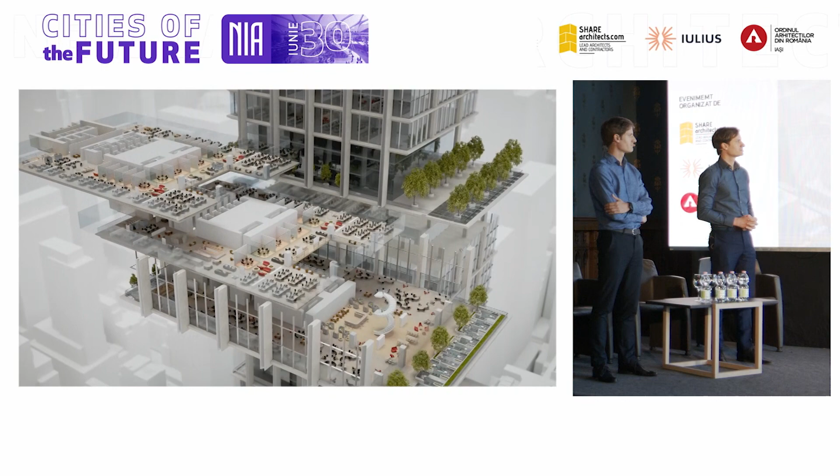Diversity leads to richness, inclusivity, strength, collaboration. Our future leaders stand among us today, those who dare to dream, those with ideas that reach far into the global community. They will carry this responsibility into a future yet unknown, redefining travel, mobility, the way that we work, the energy that we harness, the medicine we develop, the cities that we build, the planets we will inhabit.

Creating a balanced world of nature and humanity, where creativity, connectivity, and sustainability drive our society, working alongside the catalysts of change, the thought leaders, the vision makers, the game changers. We endeavour to improve ourselves, to nurture a workplace you can be proud of, to acknowledge and meet the challenges of an ever-changing world. We are the designers, the innovators, the problem solvers, the drivers of what we will become. In your hands, the power to make a difference. We can be at the heart of helping to design a better future. We have come a long way, but the journey has just begun.

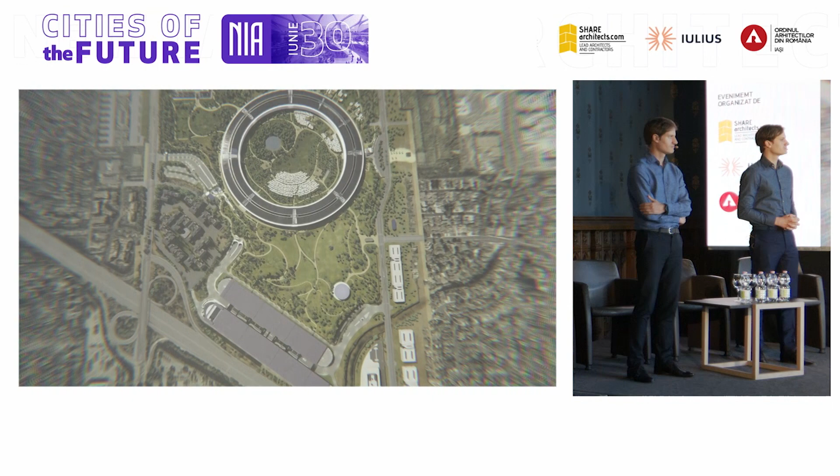I think it's a good ending because it is one of our dear projects, the Apple Park. I think probably some of you know we worked for 7 or 8 years on that project. But of course, we're here to talk about Iași, which has been an amazing journey for us — actually, at the opposite pole in terms of how respectful and how careful we've looked at it.

So the few topics we'd like to take you through today about the project, about Iași, is why we love Iași, the context integration, the public realm, a bit about the development, the residences, and sustainability.

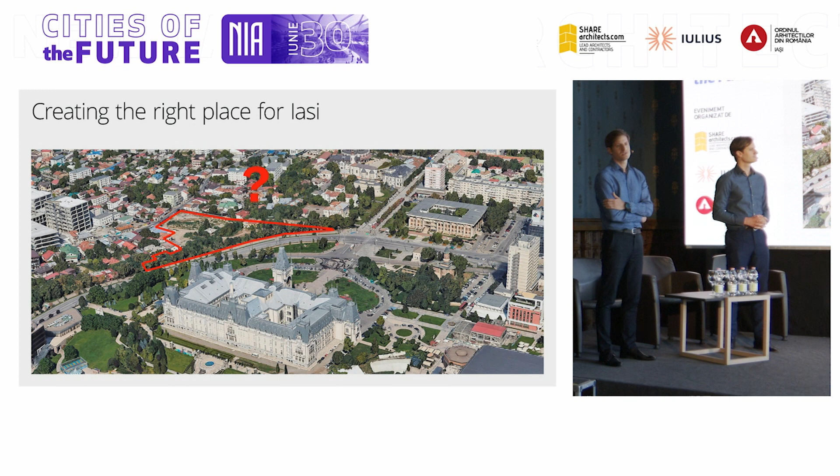We sketched the environment to get a sense for the scale, for the intricacy of details, and how people actually perceive the space. So the main question is, what do we want to achieve here in Iași, and what do you require? And we mentioned this, it's a balancing act for us. It has to be respectful of its history, but also futuristic. It has to be respectful of the heritage, but visionary, and so on.

All these different components, and we have to find the right answer for Iași. It's not an easy answer. But we had some help. The Iulius group, of course, organized all this. Without them, nothing would have happened. But the people of Iași gave their opinions, and we took that into consideration.

It has to be a place for the people, a sustainable city, a green city, a university center, and so on, but also in the corner, small, an architectural icon. So we've tried to balance all that as well.

The experts, the jury, we had a tremendous brief that helped us all develop the project. So all these came to mind, what the project should be: sustainable, friendly, nature, complex, historic, innovative, a catalyst, all of these. So for us, the vision for the project, for Iași, is to be sustainable, friendly, residential, the public realm, a historic heritage, and a destination for the entire city.

So we went back to our London office with a lot of energy. This is our team. We built models, we sketched. This is our professor from Stuttgart sketching on the master plan. Nick Haddock, our head of landscape design, found out he's got relatives in Iași, so imagine he was super excited to do the landscape design, and so on, sustainability team. And we also review it very often with our most experienced people, our most senior people.

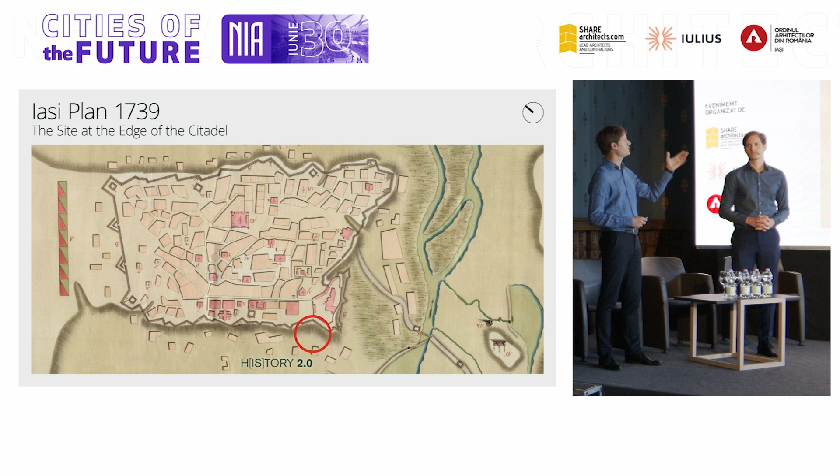So we did an extreme analysis going into depth of what Iași is, and one of the key factors for us was that the site was always at the edge of the citadel, just outside the citadel's boundary. But it was also built, which is interesting, and the front was much closer if you look outside where the current build is. It created a plaza. And everything beyond that was floodable, and actually almost a slum for many centuries.

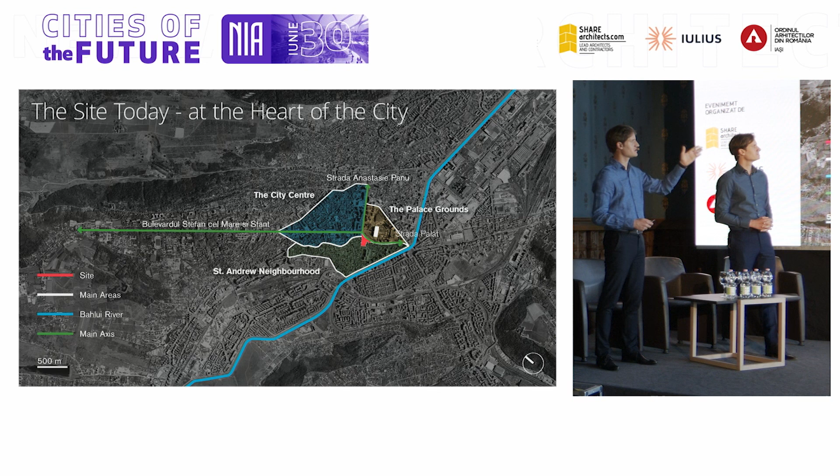When the river got channeled and contained, St. Andrew managed to grow and develop, and that was the opportunity. So now the site, because of that, is at the center of all these major axes and at the center of the city, and has amazing potential. For us, the main one is to bring life from the Palace Park all the way down through the heart of St. Andrew, down to the river park, and make that also a feature in the future.

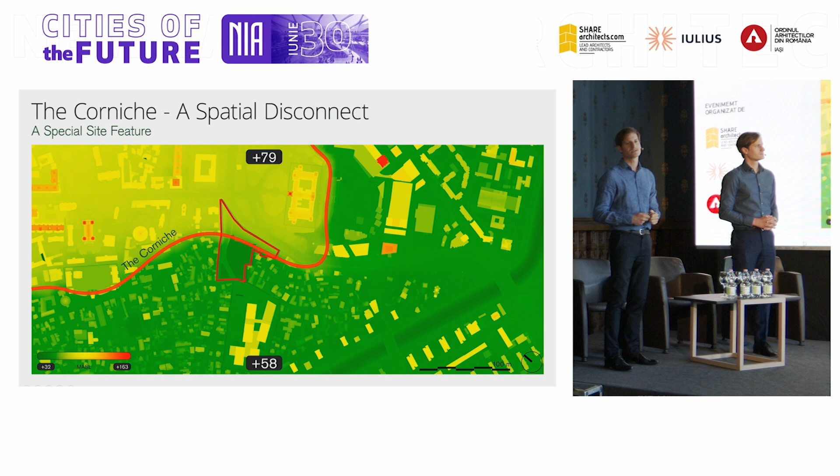We looked at the topography, and here we found this: you have a large level difference which goes all around. I don't think I have a pointer. And you've seen how successful the slope is at the Iulius Mall. We have a similar opportunity here to create a southern and southwestern facing area for the people to enjoy.

And we looked at the streetscape and saw that there's not much connectivity linking down towards the river. So the opportunity, of course, and I think many did this, is to connect through with pedestrian links, but also with vehicular links, almost like stitching the city together.

Enhancing the public realm, lighting and orientation, the outward views for the apartments to ensure best quality for the inhabitants, and stepping the gardens back.

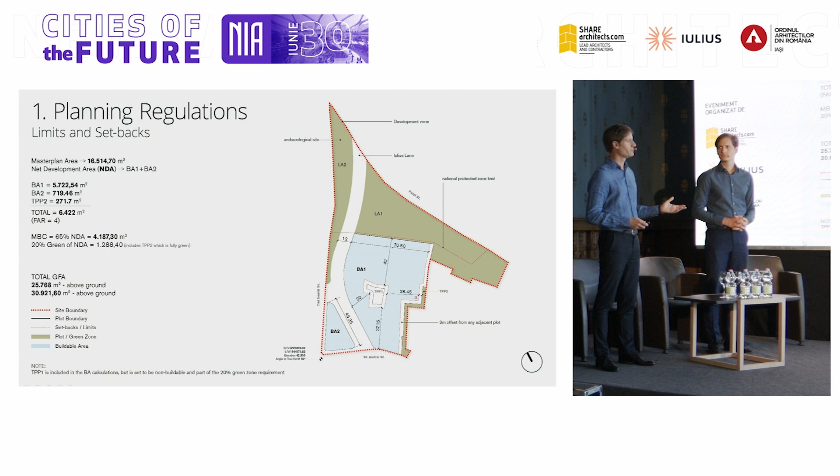So almost like a sculptor, we started shaping the massing. The planning regulations are clear. We personally are very familiar with it, being Romanian, so for us it was quite easy to determine what the setbacks and everything had to be.

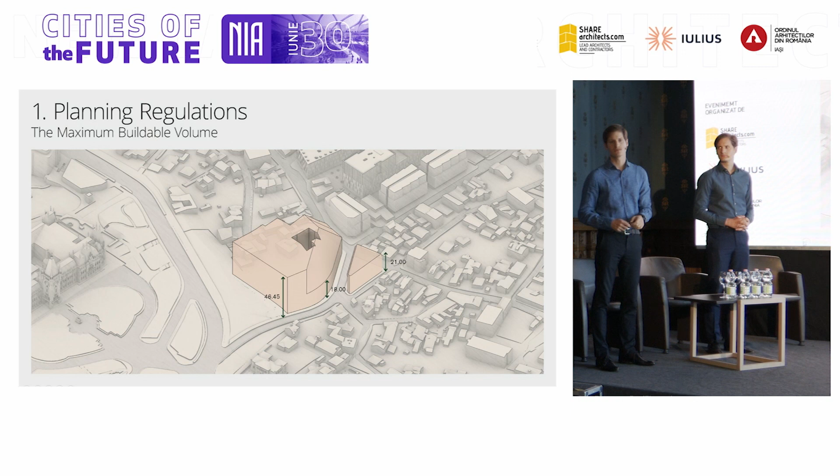This is the maximum volume you would be allowed to build on this site — a bit taller at the palace, gradually going down towards St. Andrew. That was already a clue for us; this is what the city is trying to achieve. So we started this view corridor analysis, and we did it really thoroughly, but we'll come to that.

We've predicted what people flow would do, what the desire lines are, and created connections to link the active zone from the palace place down to the river. And this resulted in further cuts through the massing.

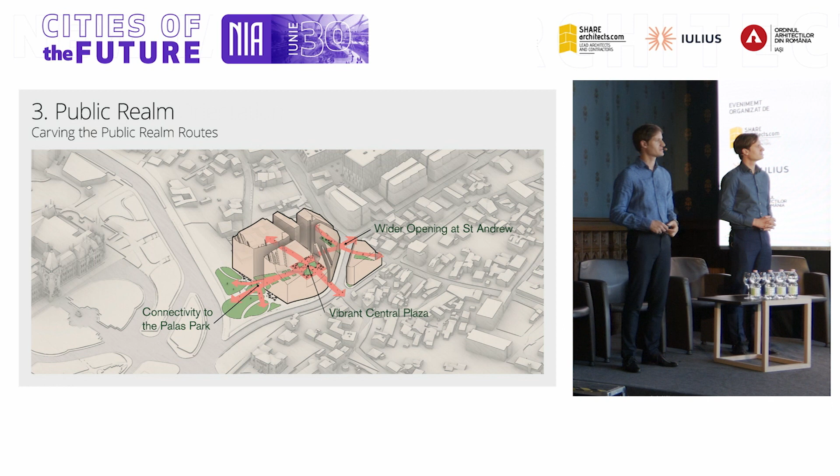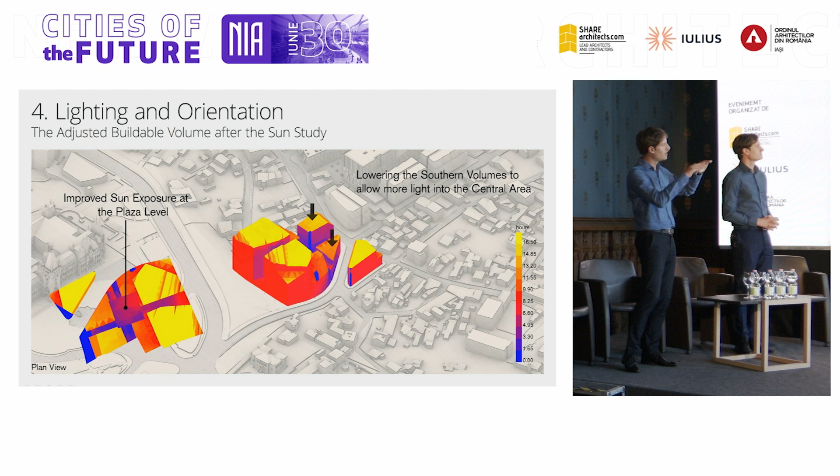Sun and getting light, the right quality for the spaces, but also for the accommodation, for the apartments, is really important. So we mapped the sun on this maximum volume and realized that there wasn't enough light within that central plaza. There's a piece of the land which we're not allowed to build on, it's the regulation. So that for us remained unbuilt, and the result is by lowering those volumes substantially, we managed to get the southern and western sun.

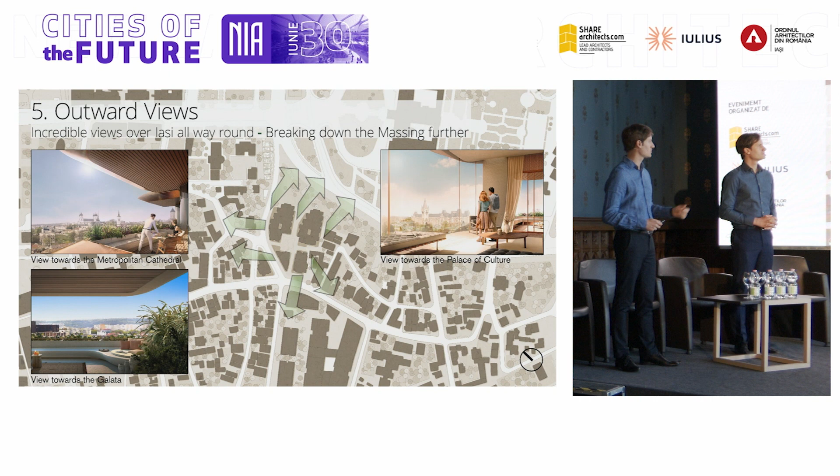This is the volume. And then, of course, for the apartments and the quality of those, the best views, looking at the palace and looking also towards the city and also Galata towards the south. And we've run that parametrically to study and prove that everyone has great views out.

The final step is this stepping terraces towards the St. Andrew Quarter. It's providing this landscaped environment, a garden, quality for the apartments, but also helps us run down towards a different type of grain.

We did loads of studies. We play with models, and we've tested them. And for us, we think there's almost like Cinderella's shoe - the building has to fit within the given parameters, which we've studied. Yeah, and this is another model. That's how we work, it's almost impossible for us to detach. It's the best way to look at it. There's a model downstairs, but we've done it ourselves as well, just to understand it better.

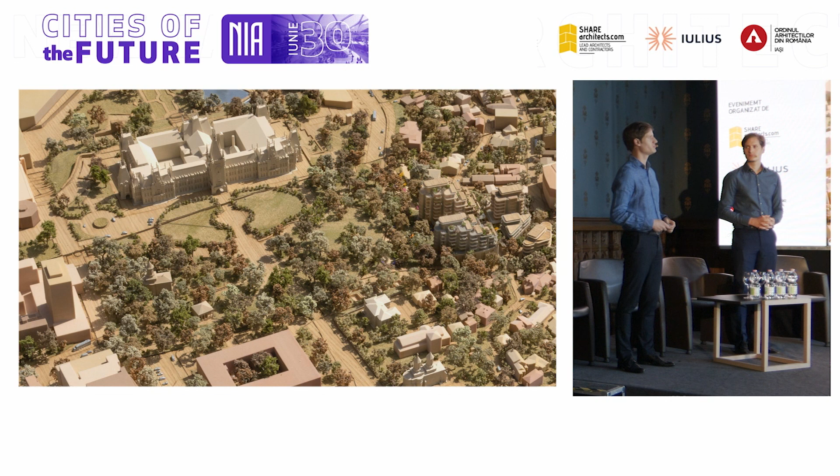And it has more context and more activation. So protecting the views will go quite quickly. Everyone has done it, but we can assure you this has been studied in thorough detail. And there's protected views, sensitive views, and complementing views.

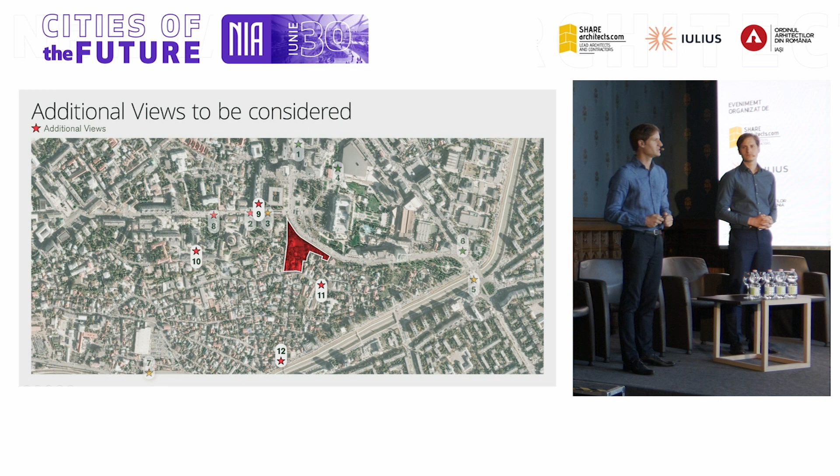All of Ștefan cel Mare, as you walk through it, you should never see the development. It doesn't matter how important it is. It doesn't matter how beautiful it is. You should never see it. Yeah, so the massing in its state is always hidden behind the monuments.

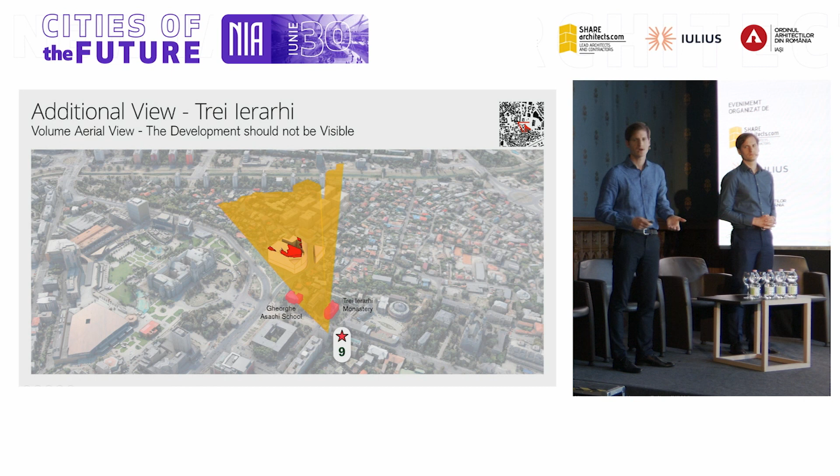There's one particular view, if you go to the other side of this street, where you could see a bit of it. So the immediate step for us was to cut it off. You can't see it, it's conflicting with history.

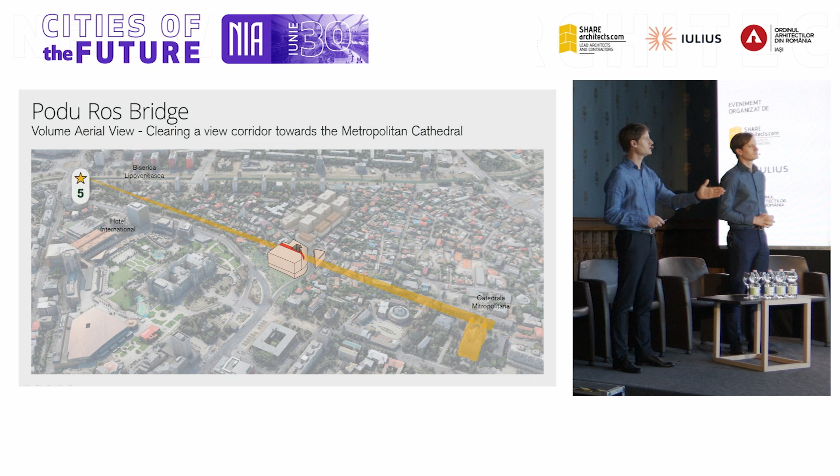If you go to Podu Roș, you can see the Metropolitan Church, Cathedral, and you can see the overlap of the building. Again, immediately, we want to remove that. We want to have this view corridor, to see the cathedral. So the cut goes right through the volume.

You barely see it. But also this opportunity, while you're there and you walk around, to enhance the riverside. So for us, it's looking outwards - it's not looking only at the site. It's looking at the entire city and finding moments.

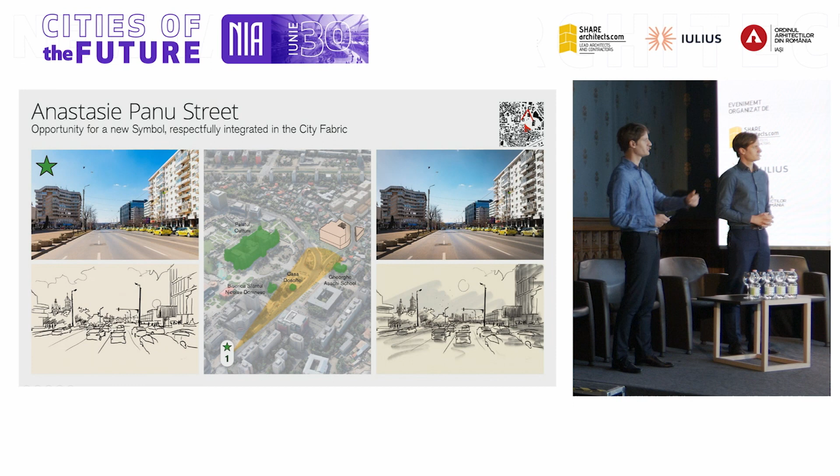And there's some other views, yeah, where you complement - the building becomes part of the composition. It's end of the perspective, in this case, or within the palace place. And we've tried to break down the massing, scale it down to start meeting the height requirements for the old monuments.

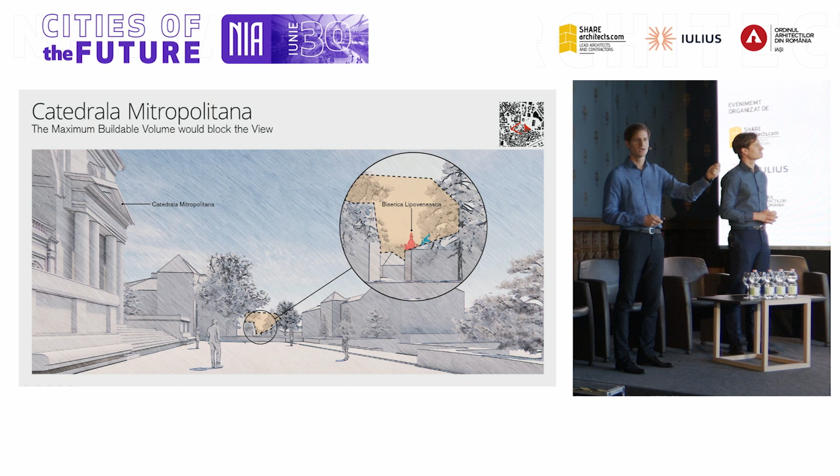We've also done a few additional views because we walked around the streets and found out that there's really important sight lines that should be protected. One of them from the Metropolitan Church, looking to Biserica Lipovenească, and you can see those towers, and they're actually shining in the light. If you see, it's quite a glossy surface, and it's a pity to lose that. So again, we've reacted to that, and you can see it now.

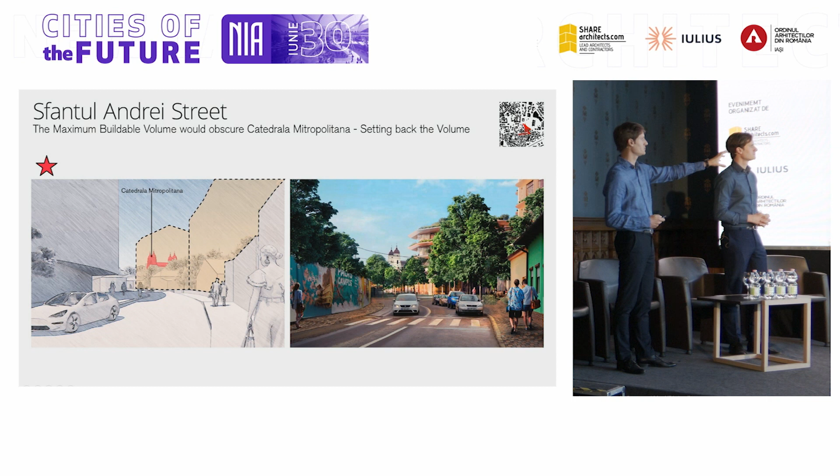Similar from St. Andrew, as you walk to that street, there's a visual connection to the Catedrala Metropolitana, and we can recess the volume or cut it in order to allow for that view to happen.

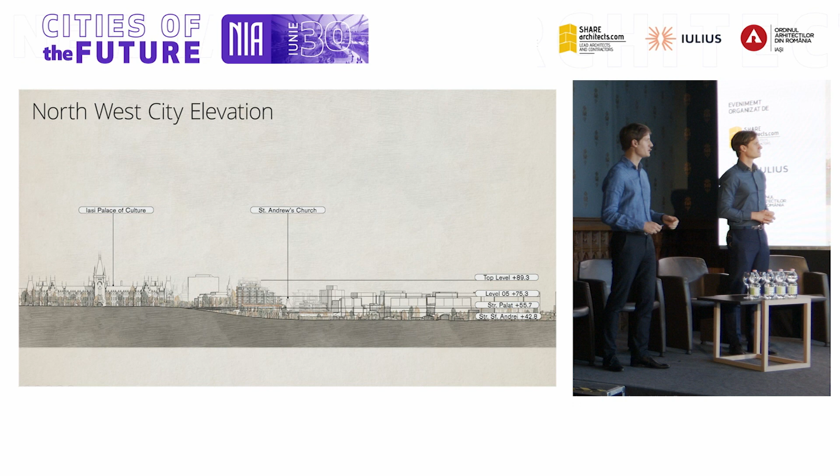So after all these steps, from this maximum volume, which is the regulation - you can build this - we went into shaping it to a grain that we think feels very integrated within the fabric. Larger buildings to the front, the smaller grain towards the St. Andrew quarter. And also in section or elevation, you can see the palace is still always the king of the place, and our building is creating a front and gently stepping down towards St. Andrew, always below the palace.

In terms of the development, the building itself, a few ideas so you understand how it's structured. The public realm is for us the most important thing. It's a high space everyone can go through. It's public. This is a gift for the city from everyone, from the developer, from everyone.

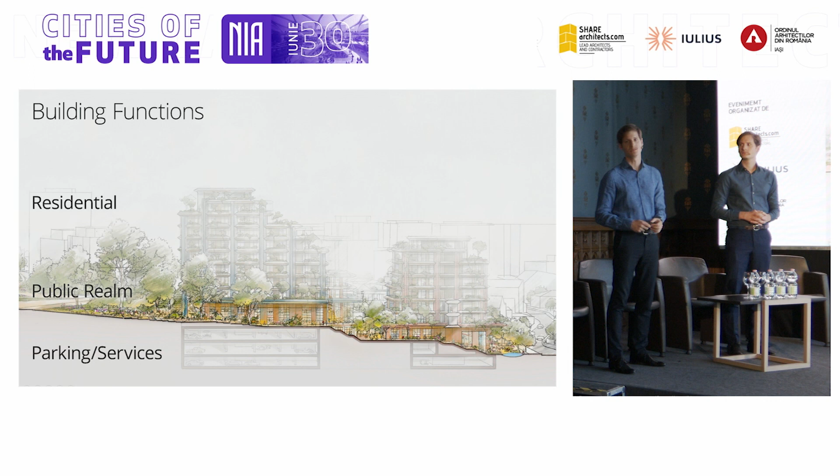The residential is clearly separated. It's a more private program, and we want to keep it separated in terms of function, acoustic, and so on. And below the services, the parking that's required per law, also as efficient as possible, because the more efficient you do that, the more quality you can have at the top.

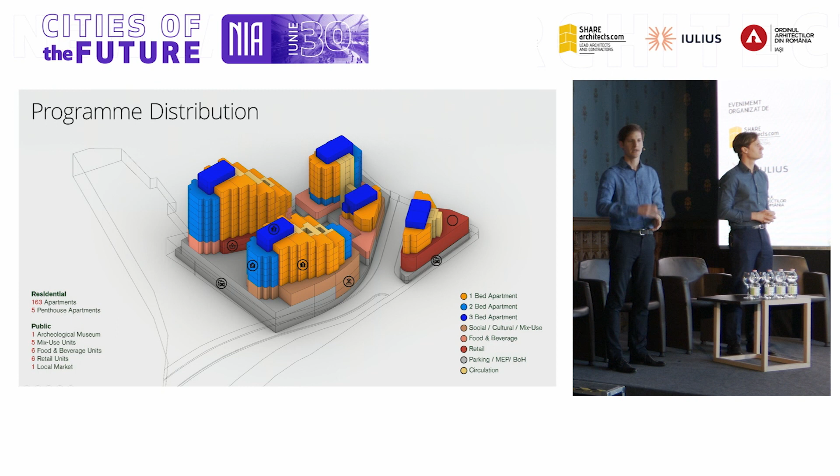In terms of program, residential primarily in St. Andrew—it makes a lot of sense to have some of that on our site as well, and then the activity towards the palace. So that's basically how the massing works for us, very simply. Parking, the whole commercial or public space at the ground plane and first floor, and then everything above is apartment—very well structured.

The public realm is the most important thing of the project, and it's structured around the people of Iași. So we took into account everyone's opinion, and we wanted to create this place really as vibrant as its people, very diverse. We go from the Palace Place, meandering down a landscape path into a contained plaza, which can be the heart of this place, and then further down to St. Andrew, where another little plaza is.

I think the project should be called—just a little annotation—I think 'The Heart of Iași' is probably the title of the entire competition. For us, it's probably 'The Heart of St. Andrew,' that's the title, which is more appropriate probably. The Heart of Iași is obviously this place in front of us, while that can become something that relates to this, but also to the St. Andrew neighborhood, which was always somehow forgotten in history.

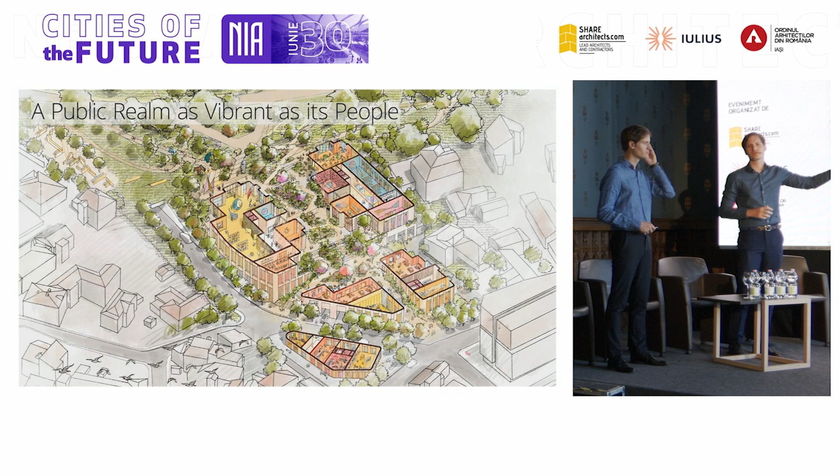So it's a really active place that is programmable all the way throughout the year. You can do events there, and you can have people meeting.

Now, day one is where we see the development today, structured around the plot, and we've designed it in such a way that all the cars actually stay on the outside. You don't bring drop-offs onto the site. We want to enhance the public realm as much as possible. It's all a park. But what we saw as an opportunity is actually the future, where you think...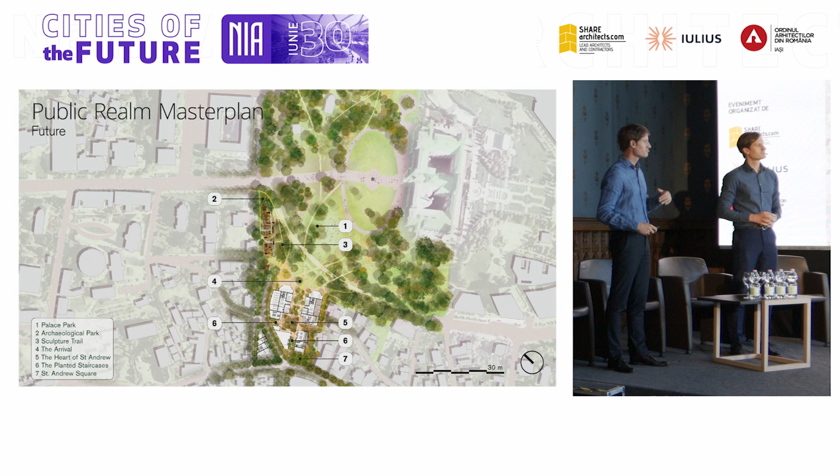Anastasie Panu and Palat Street could be connected through an underground connection, and that could open up this whole thing to the palace. It's pedestrianizing this area and connecting Ștefan cel Mare to the palace entry. I think that's years ahead—we don't know if that's possible, but for us, it became a dream. And we think this could be a real contribution to the city as well.

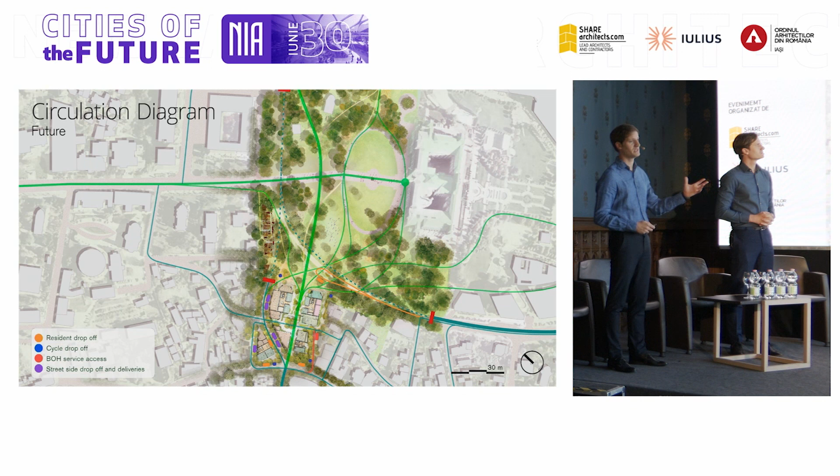So, really a pedestrianized area, a large park. And we said, how can we quantify that? How can we explain it to you? It could create a park that's 11.5 hectares, the same size as Copou Park at the end of this axis. So you have these two poles, two amazing parks within the city.

Some scale comparison—Jardin des Tuileries in Paris, for example, or Green Park in London. It could be absolutely amazing having something like that.

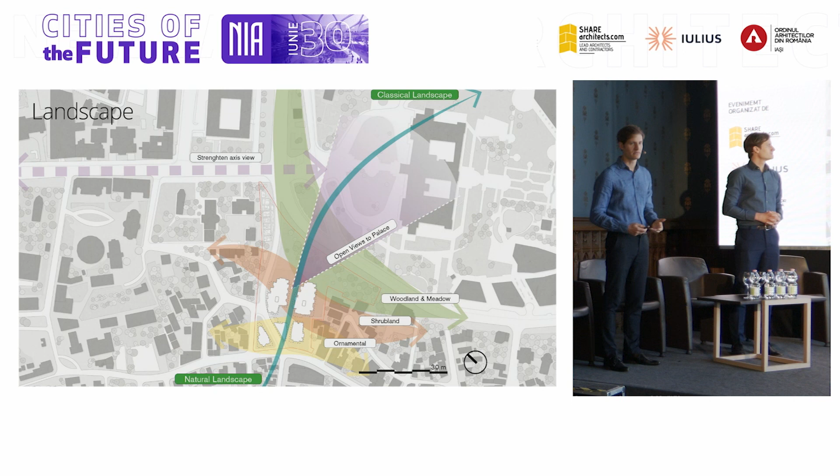Landscape-wise, the concept is to come from a classical landscape towards a more naturalistic one towards the base, towards the river. It's a clear reference to the formal part of the city, the Palace Plaza, and then the more natural riverbanks. We even worked out the palette—I told you about the landscape architect in our team who found family here. He got really excited; we have a native palette here as well.

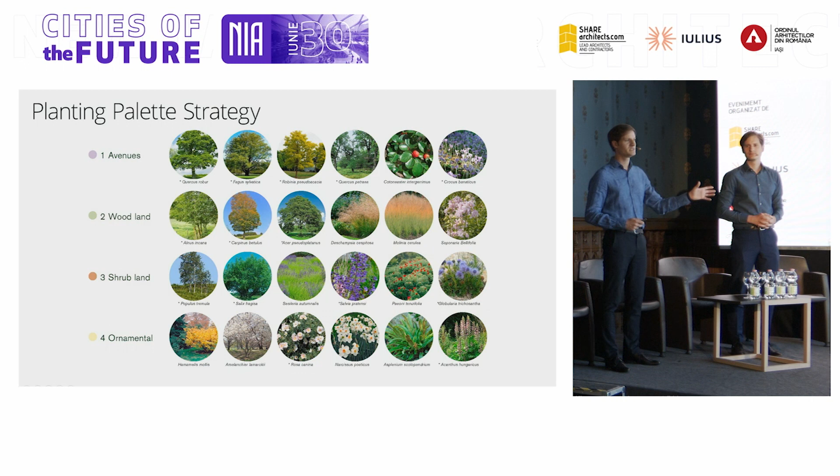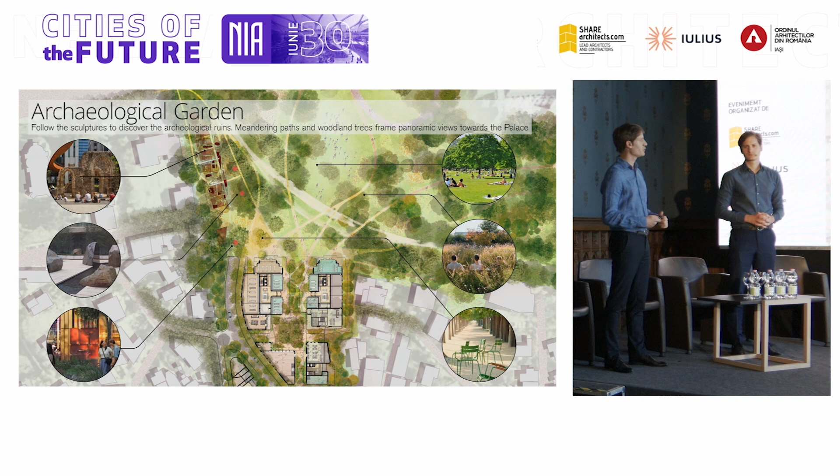Heritage, and how we enhance it. We have an exhibition space and a gallery within the left-hand side building.

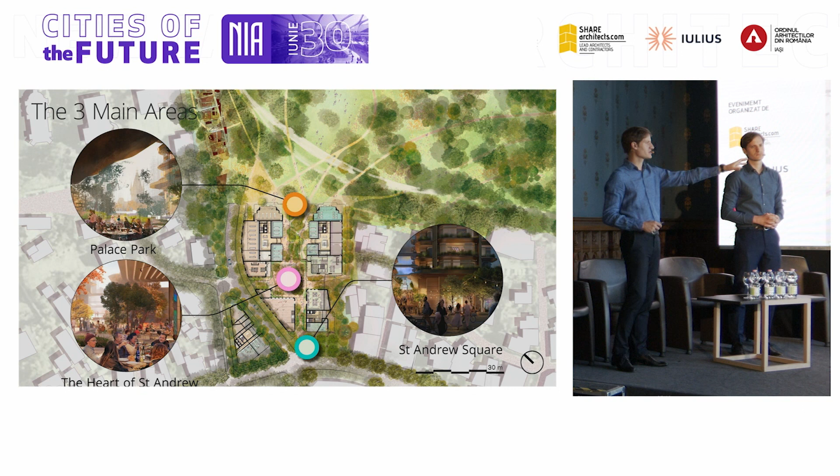There are 3 moments within this project: there's the park at the top, there's the heart of St. Andrew—the central plaza—and the St. Andrew Square at the base. And this is how they relate to the topography. Topography gives us a chance to create different moments, different quality of spaces, and it should be super vibrant and varied.

The St. Andrew Square is dedicated to the neighborhood—it's supposed to have little shops, flower shops, the butcher, all the amenities the city would need. The heart of St. Andrew is something more vibrant—it's restaurants, it's evening, it's sunset, it's all of that. And the park, the Palace Park, is a bit more formal—it's what we see here, enhanced.

It's the layout. We have the 2 major buildings towards the palace, which is a bit more formal, so we have larger mass here. And then as you go down, you have the 3 smaller elements facing the St. Andrew neighborhood.

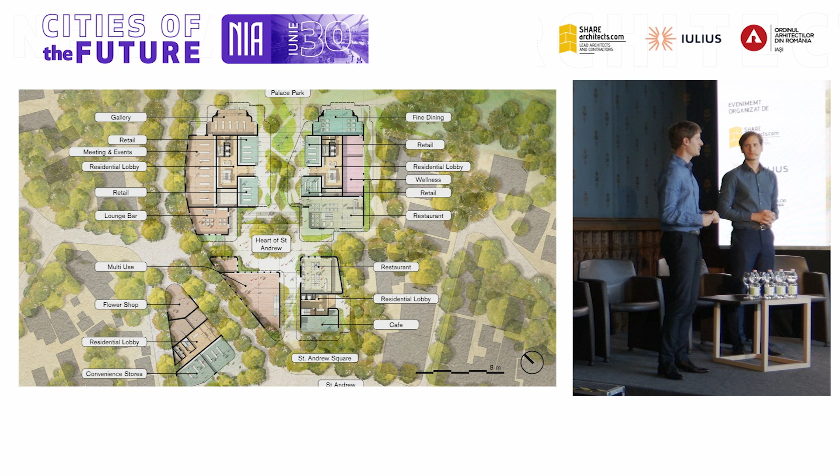Really important for us was to activate the streetscape as well. The opposite side might get improved, and we think this should be a pleasant walk down the street towards the river. It's not only about the internal circulation.

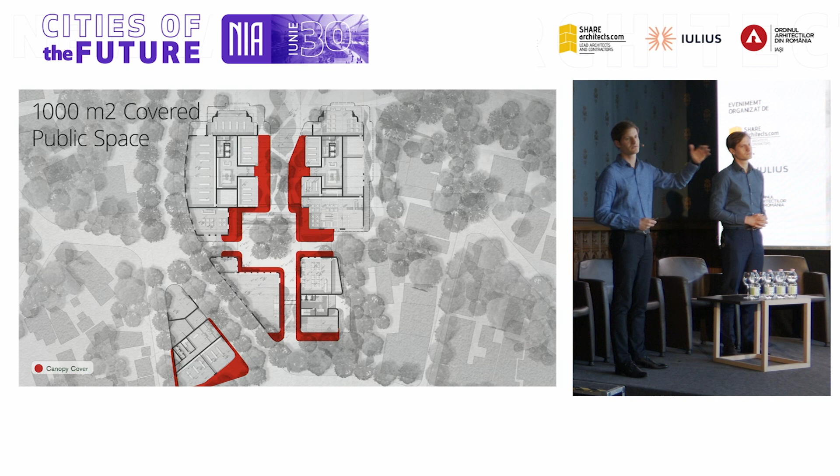The heart of St. Andrew is clearly defined as public space. A really interesting thing we wanted to bring here is the quality of the outdoor space, so we're giving 1,000 square meters of covered outdoor space.

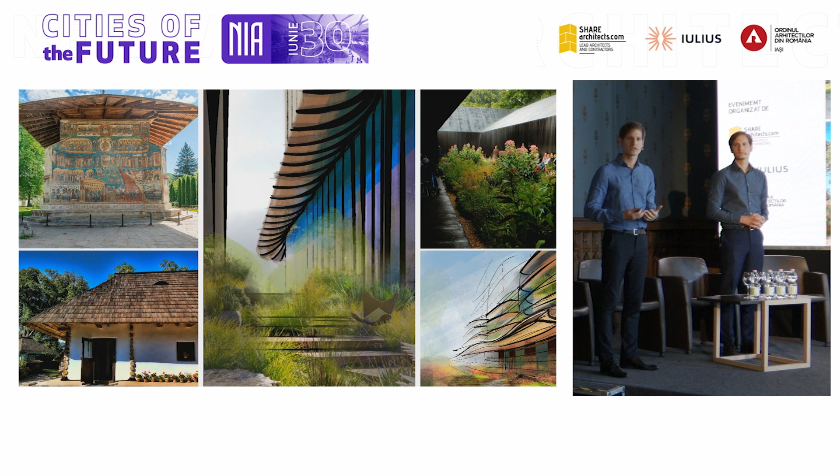This idea is really embedded within the Romanian, Moldavian way of thinking. It's a very sensible approach to how to be outdoors when it's raining, when you have too much sun, how to protect the building. And we took that a step further, because we know the climate actually wants this.

There's great quality from March to November. You can stay outdoors and enjoy the weather, but it's also quite rainy, almost as rainy as London, so you want some protection.

This is an image coming through that pathway towards the river, and you can see people enjoying the weather, enjoying the outside. It can be autumn, and you're still outside, protected.

This canopy also provides privacy from the apartments above and creates a clear separation, which we think is required. People want their privacy. The warm materiality—we think the future is happy, warm timber, maybe stone. It should be something pleasant.

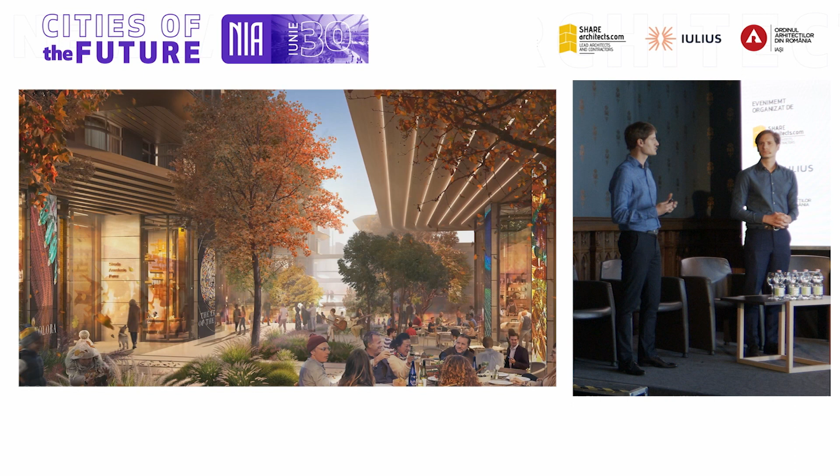It's a place for the city. As you move down to the heart of St. Andrew, you get a larger height, people enjoying the outdoors. It can be almost like a Rockefeller moment, people come there to enjoy all seasons.

And of course the view corridors—you can see all these different historic elements and the connection to the monuments.

Coming down to St. Andrew, this is a much smaller scale dedicated to the neighborhood, with a reference to the river, a little water fountain. People can stay and enjoy the evening sun.

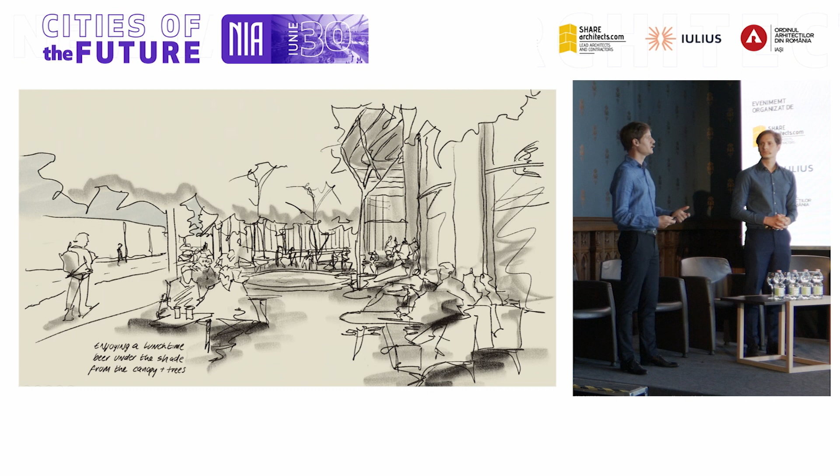This is orientated towards west and towards south, so you can imagine in the afternoon enjoying a coffee or a beer with the sun—it could be the best moment of the project.

This is the view in the evening for the neighborhood. It's a smaller scale, people come in from these little streets and find this oasis. And still you see this connection to the old city—Trei Ierarhi, Sfântul Nicolae Domnesc, and the palace.

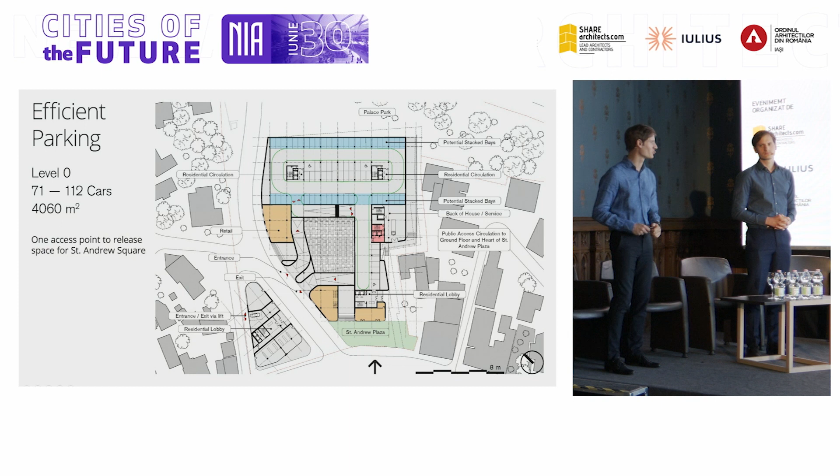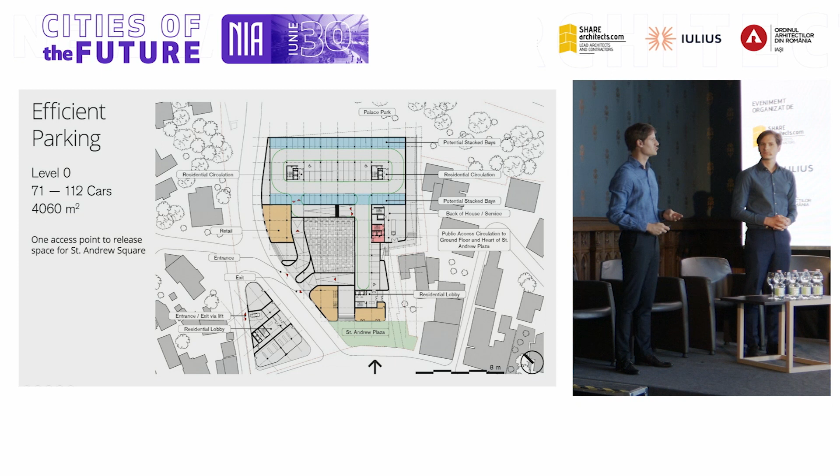In terms of parking and the building, for the architects and those more interested, the few points we took from this was to try and keep it as efficient as possible. We've created a large block at the end containing most of the parking, managed over 3 levels, which allows us to future-proof the building.

In the future, maybe there's not so much parking required because of self-driving cars or closer proximity, so you can transform the conventional section, either putting in more car parks or transforming it into offices or retail or anything you want.

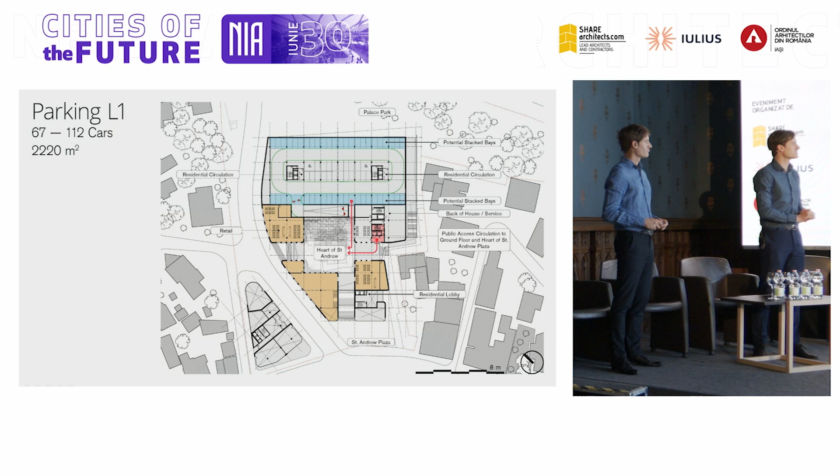So the ground floor and first floor can be transformed in the future. As you can see in this plan, it's parking now, but in future you could have offices or further commercial opportunities—shops, kitchens, restaurants, whatever it is. That's a big future-proofing component.

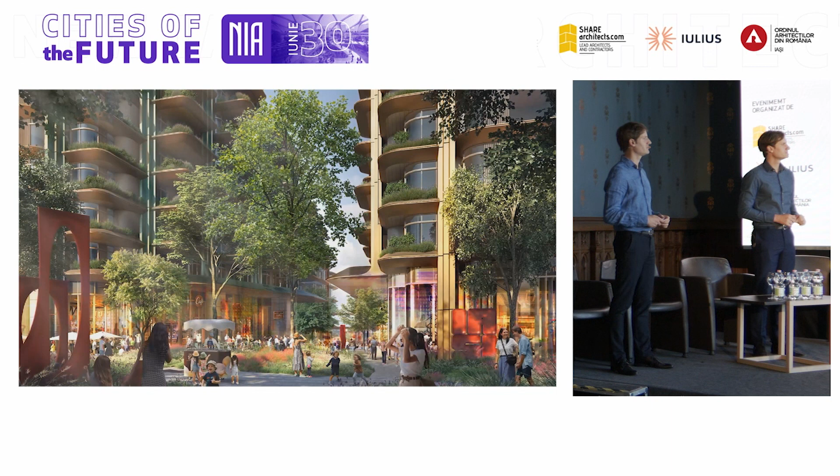Coming to the residences, this should be a proper address for its inhabitants. It has to be successful also for the client, for everyone—it has to be a viable project. So we've tailored it into these 5 buildings, all of them slightly individual.

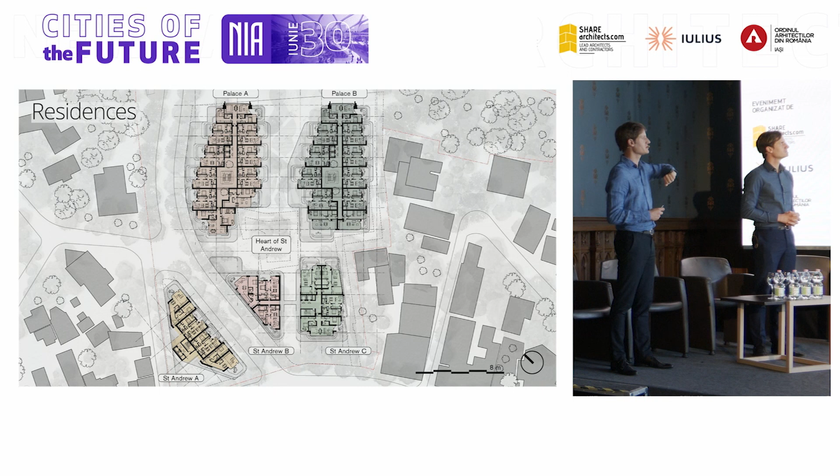The ones at the Palace we call Palace residences, and the St. Andrew residences have quite discreet entrances. You come in gently, but then the space opens—there are large residential lobbies, and we wanted to emphasize this verticality. The atriums are open, so you can see over multiple floors, giving a grand sense of entry to your building.

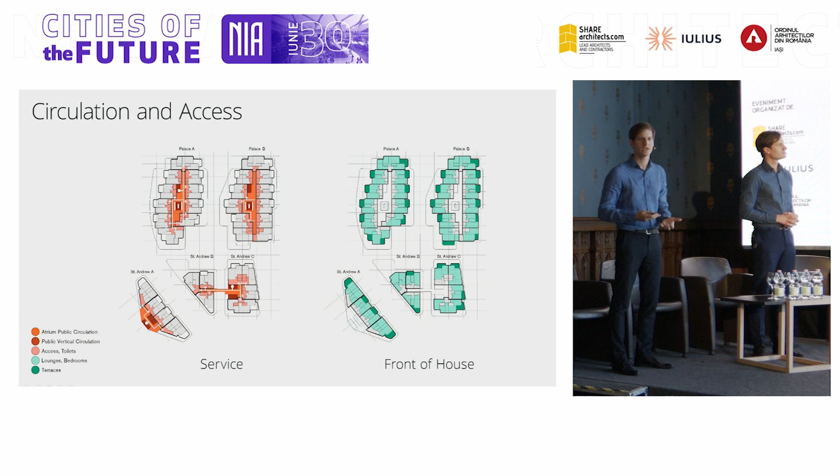Simple layouts, with everything arranged around the central atriums and cores in terms of functions, and then all the front-of-house spaces—living room, terraces, bedrooms—all facing out toward the views.

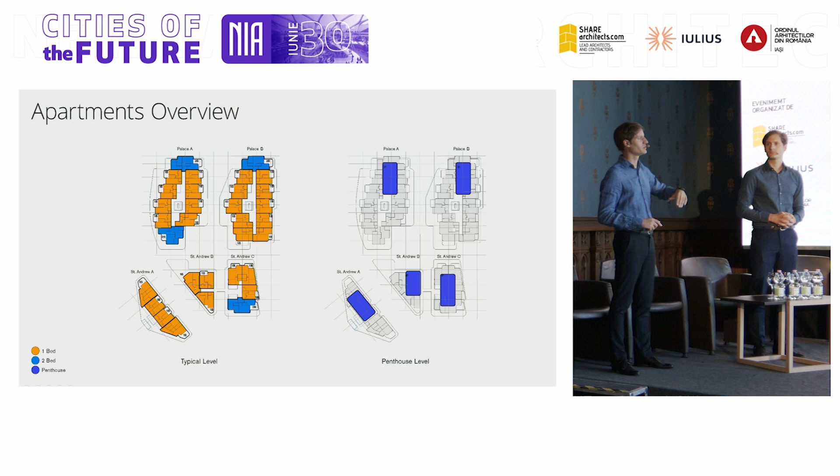Everything has great quality. The 1-bedroom apartments, the 2-bedroom apartments facing the most incredible views, and each building has a penthouse at the top, a 3-bedroom apartment. Just as an example, this was the brief.

Very small 1-bedroom apartments, but for us, for every single one, we want to ensure quality. So you come in, you've got the living and kitchen. Kitchen can be closed. A large terrace, very important, because people start enjoying their homes more and more now and got used to spending more time there. And an ensuite bedroom. And this, I think, has quite a quality. The planting acts as a filter, etc.

I think also worth saying is every apartment type has this corner condition, so you get diagonal views throughout from each and every condition.

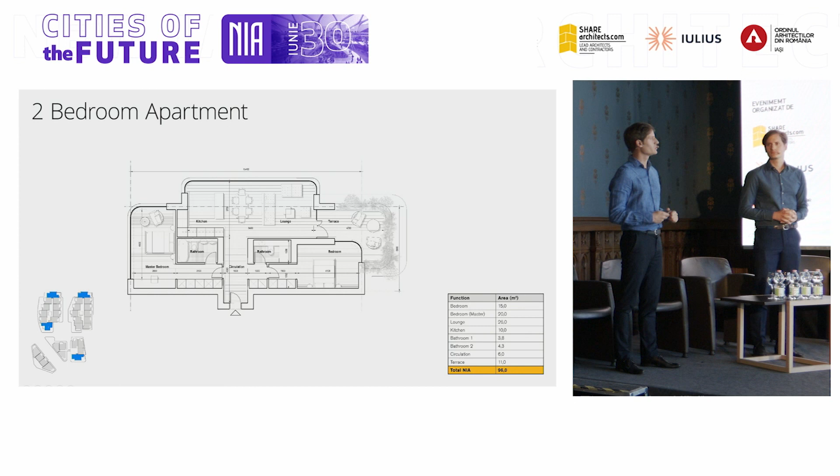The 2-bedrooms, these ones are facing this place, the Palace. You're coming in centrally, you've got this longitudinal living room with a terrace, and just quicker, this is the view you would get.

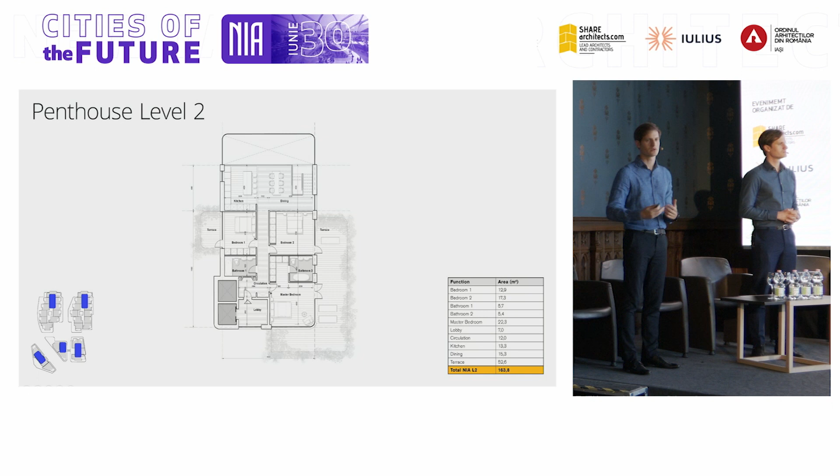I think it's really incredible for whoever moves in here. And then the penthouse, these are 2 stories, large double-height living room, terrace all the way around. And you can also access the upper floor through a service route from the 2nd floor.

You want to talk through the vision? Okay, in terms of the vision, I think for us there are a few components. It's the verticality, what we recognized. Every building in this city, or the majority of the important ones, the Palace, all the churches, the Cathedral Metropolitana, they all have a common theme. It's verticality, and we tried with our concept to express that.

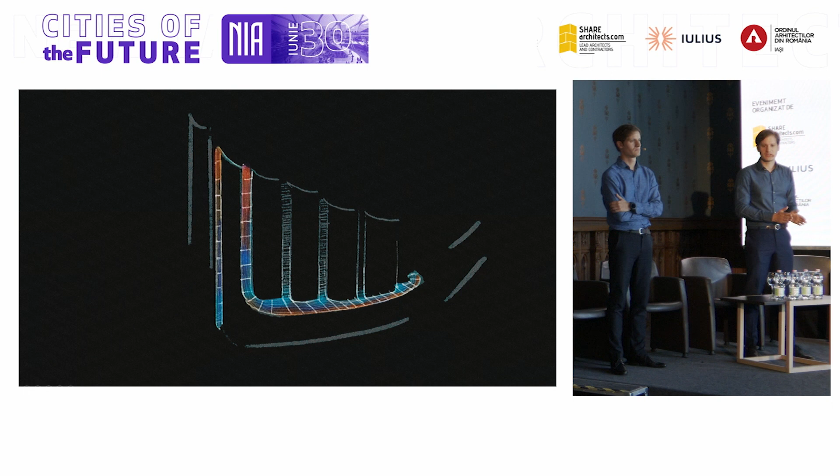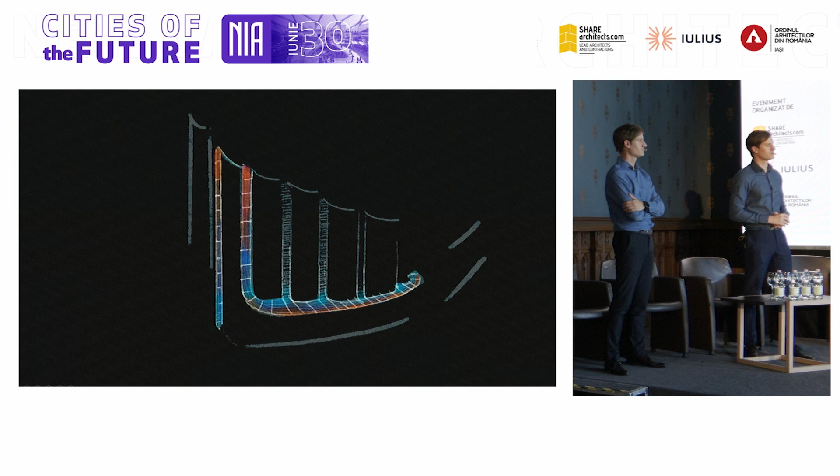The other one was the horizontality of the canopy and this overhang, which creates this intimate feeling of being under the canopy, in this warm and friendly environment. So taking all those on board, we developed this with a strong presence at the Palace, the enhanced verticality, which also creates this slender, minimal appearance, imagining it outside, and then translating it into the horizontal plane. This can create quite an iconic and striking appearance, which would work very well in relation with the Palace and the existing fabric.

You can imagine it in a few years with the park in front and the whole landscape coming to life. I think this is what we're looking to achieve, this openness of the space, the building leading you through to the next piece of development in the city, the river probably, and creating this permeability through the site. I think materiality was also one of our topics we thought about in depth, and we wanted to make it of the place.

We found inspiration in all sorts of materials and buildings, and something that drew our attention is the terracotta or tiles. There's a lot of craftsmanship in it, in local history, but we of course want to give it the innovation and the twist, it has to be very performing. It can be large formats of super bioactive ceramics which can do self-cleaning, and they can even do air cleaning potentially. So quite innovative in that sense.

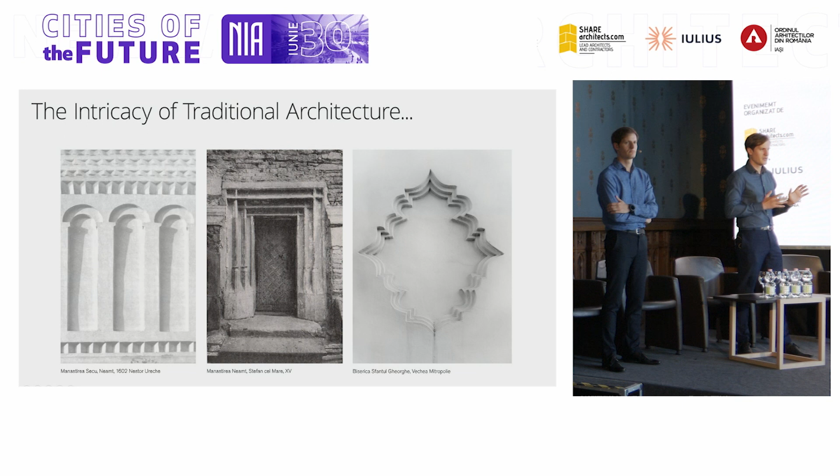It gives us also the opportunity to separate and differentiate between the 5 buildings, to give them their own identity, because we're building a part of the city, a small neighborhood with these buildings. And then we found the intricacy of the details as well, which highlights in a way the verticality, but also refinement in the project.

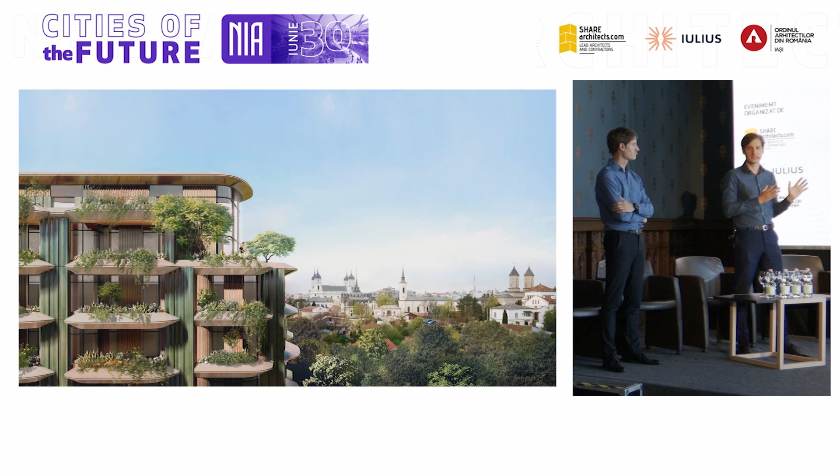I think this helped us define and create an architecture that is timeless, that would stay and withstand the passing of time. Sustainability, really, really important for us. We left it for last, but just to make a point: everything you saw is building the layers of sustainability from bottom up, with a park, with a wellness component. Our office has been doing sustainability, as you mentioned, since the 70s, since it was founded, and throughout every project there was innovation in that respect.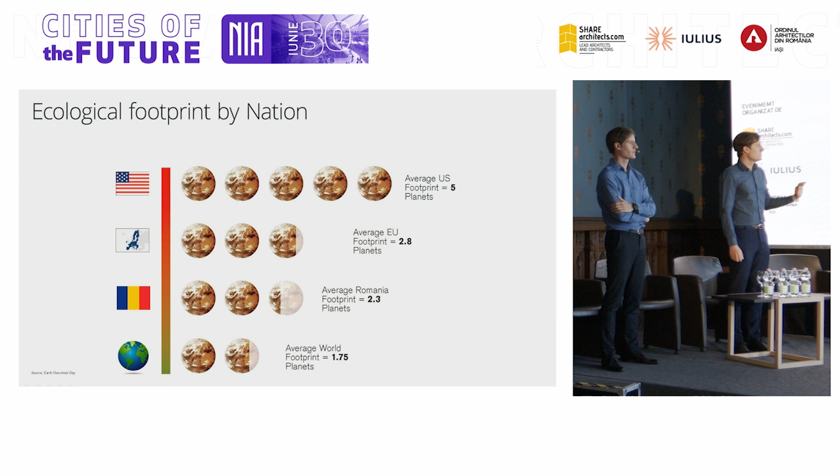But we can do many things about it. As an office, we've been involved in the Paris Agreement, writing and helping visualize what it means, because it's a very complicated and detailed document. It says we have to limit the global temperature rise to 1.5 degrees. At the moment, the temperature rise historically has risen from the industrial age till now by about 1 degree. We want to contain that.

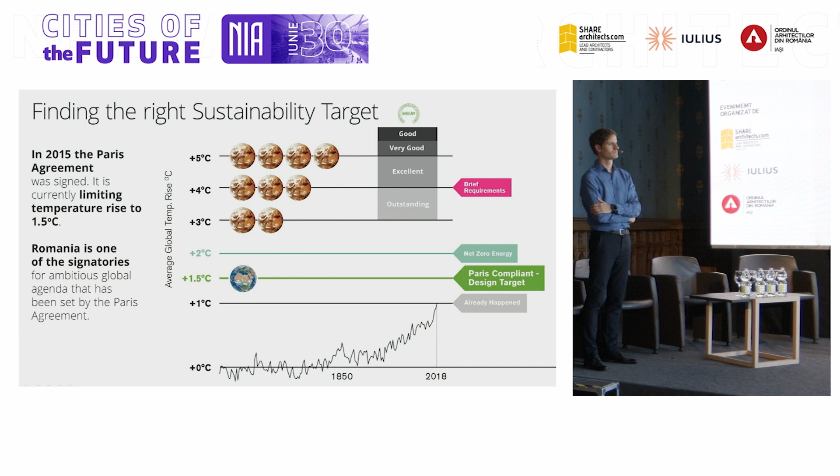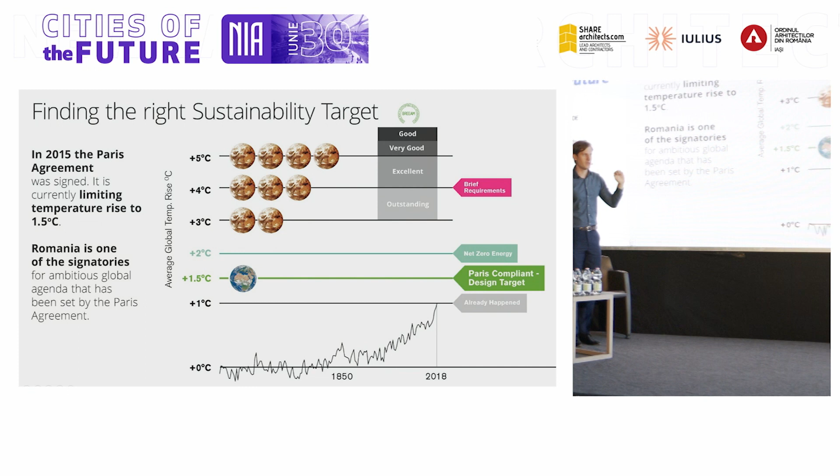At the moment, what the project is doing with BREEAM Excellent, which is an achievement of course - it's one of the standards, a high standard - it's only achieving, as you can see, 4 degrees. So it's not that forward thinking, and we want to push the boundaries for that as well. I think we want to do a lot better than that, and we think we have all the tools to do it.

So just to put it into perspective, buildings will have the same fate as cars in a way. Petrol cars are being banned, electric cars we see throughout the world, and bad buildings will also be punished in a way. If you're not performing, you're not going to be competing, you're not going to be able to build anymore. So it has to be taken really seriously by our industry.

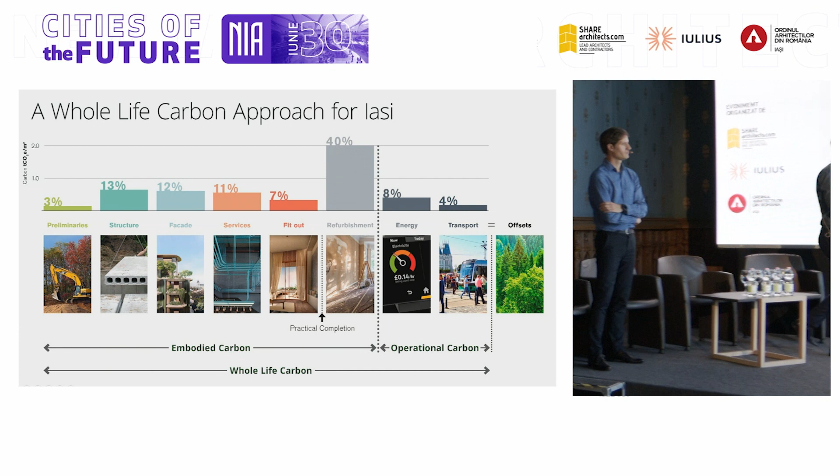We try to summarize it as much as we can. This is specifically for Iași, for this project, in this location. You can see we always talk about operational cost, carbon, which is what the building consumes in its lifetime. We have to also address the embodied carbon, how you build it and how efficient you build it - it's a much bigger component of this.

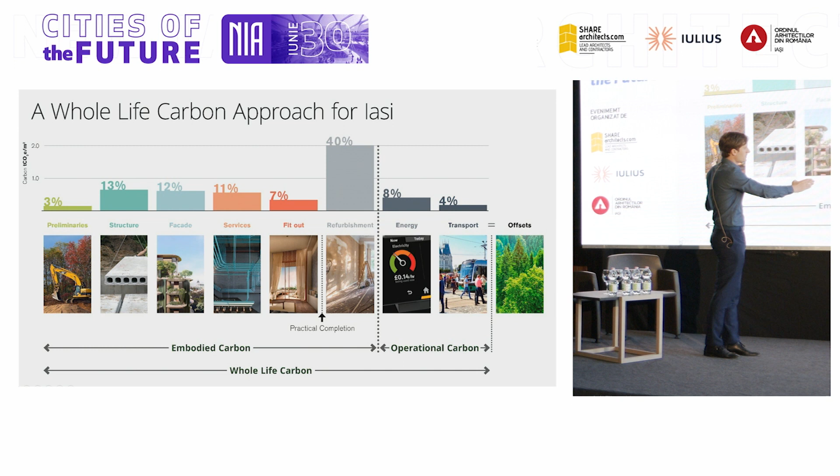I think one thing to highlight from this is the transport. We're very good because we're in the center of the city - that's already a given, so that's perfect, and that's something to promote. You have to build further in the city and be closer so you can use public transport and have walking distances. Now, we have the tools to lower every component we just mentioned, from how you start the project and design it, to the structure, facades, and so on.

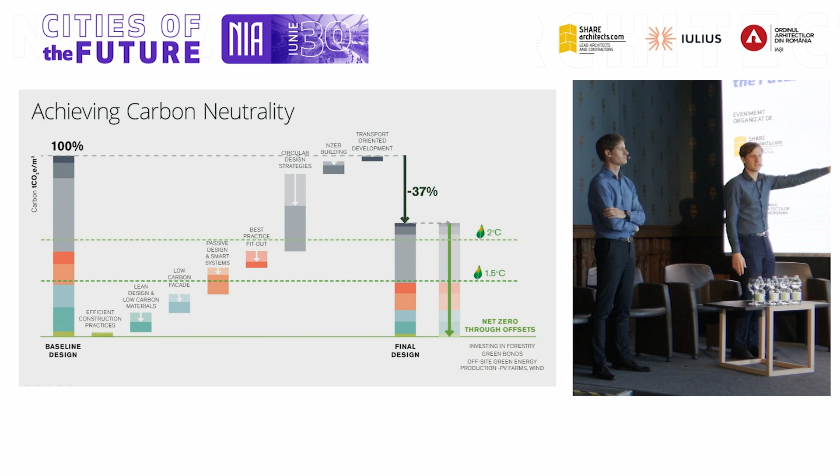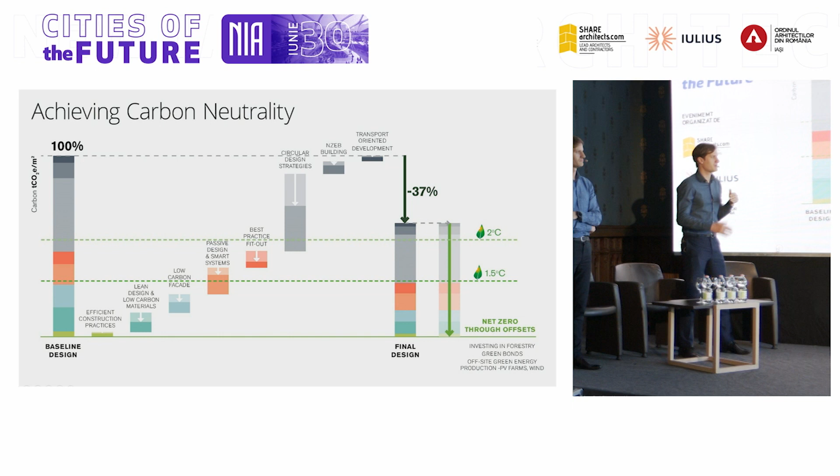We have the means of lowering the carbon by about 40%, which is already reaching, you can see, 2 degrees - so it's getting close to that 1.5. And then you can additionally push with offsets, by investing in forests or building a park in front, and other things. So we see it as an organism, the whole building.

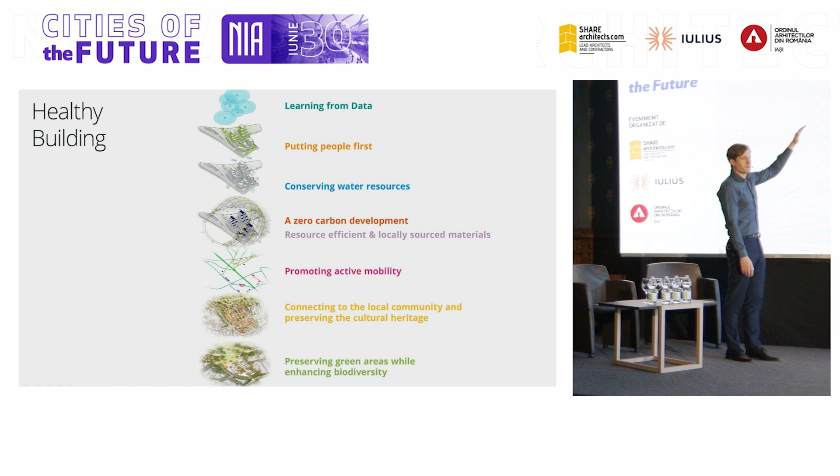We'll just cut it short, but it's starting with what we talked about - the park, the public realm. It's all about well-being and how people feel in this environment. Then it starts more physical, with how the building actually interacts and performs - a zero carbon development, the resources, how you build. Is it a concrete building? Is it a timber building? Conserving the water, capturing all that water that rains 11 days a month. Putting people first, of course, and then also learning while operating the building.

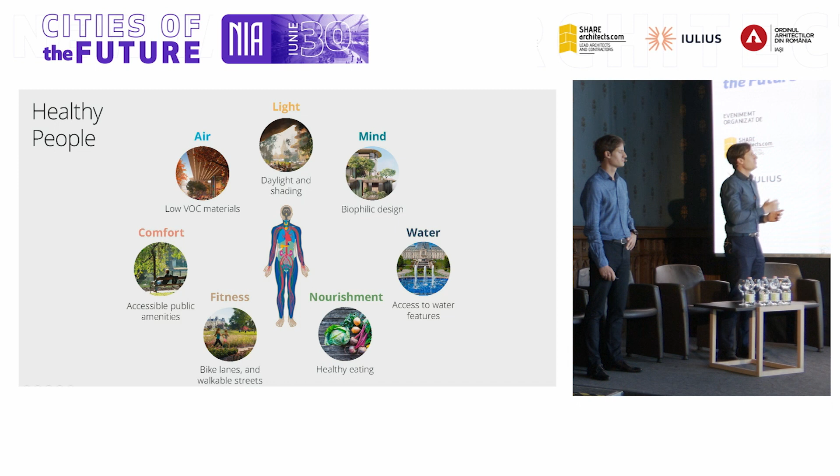And that ties in very well with the well-being of the people, and it creates this whole quality of the project. So I think, summarizing the project, what we're trying to achieve is to give a lot more to Iași than just a building or just that site - to enhance our thinking through a citywide approach. And I think these are the key facts: today the site is inaccessible, there's nothing. Tomorrow, when we manage to do something, you do get quality space, outdoor space, but there's also this further potential which we're really keen to explore.

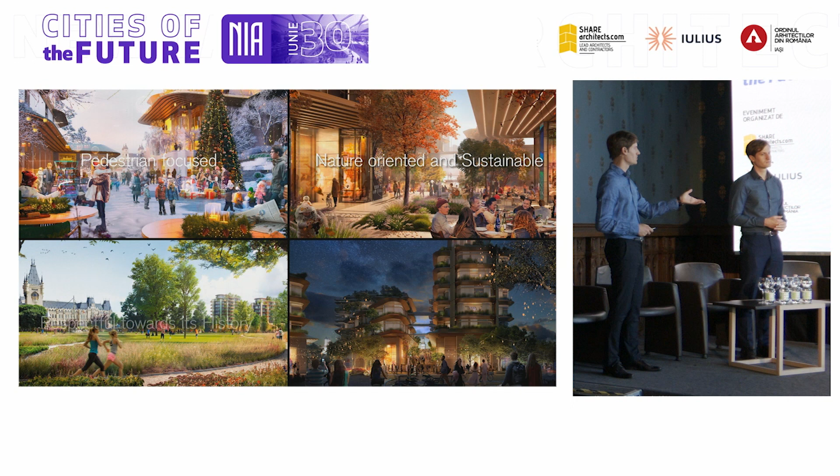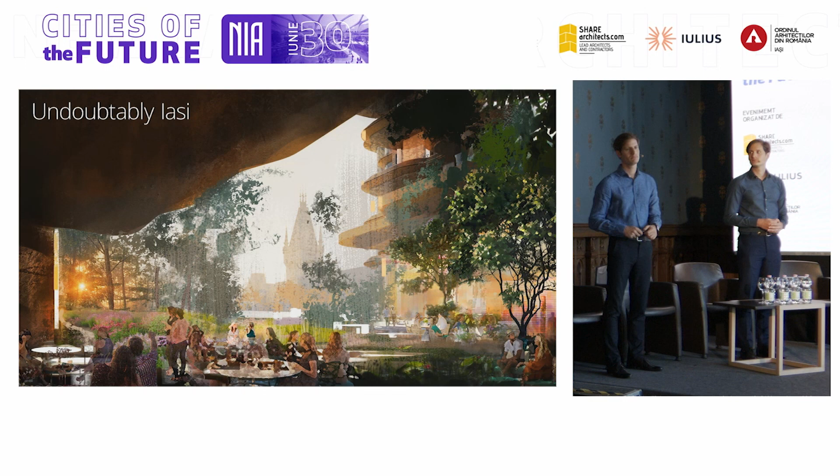I think what the focus should be is pedestrian-focused, nature-oriented and sustainable, respectful towards its history, and diverse, lively, and open. And we think it should be undoubtedly Iași - when you see it, you recognize it as a piece of the city. Thank you.